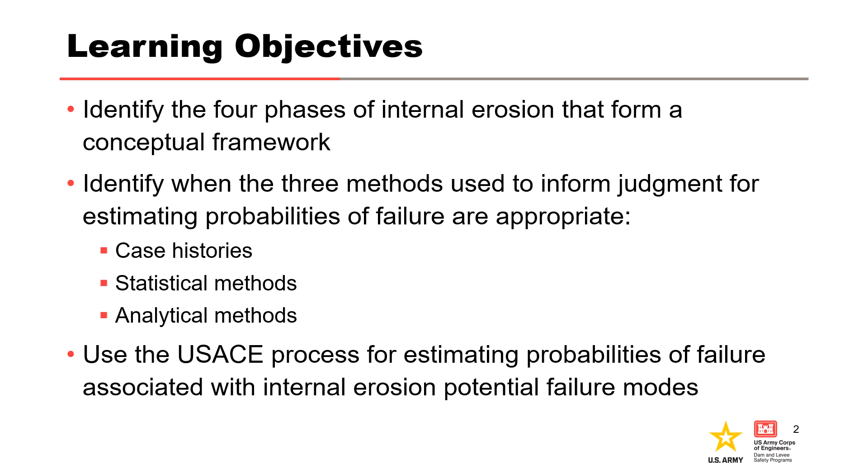Here is the outline for this presentation. The conceptual framework for internal erosion and its phases will be discussed. There are three methods to help inform judgment when evaluating internal erosion potential failure modes: case histories, statistical methods, and analytical methods. This presentation will conclude by providing an overview of estimating probabilities of failure associated with the internal erosion potential failure modes.

Conceptual framework. Internal erosion has commonly been described as seepage and piping in the literature and by practitioners, but this poorly characterizes internal erosion. All dams and levees have some seepage as the impounded water seeks paths of least resistance through the embankment and foundation and should be controlled to prevent erosion of the embankment or foundation or damage to concrete structures. Seepage becomes a concern if it is carrying material with it.

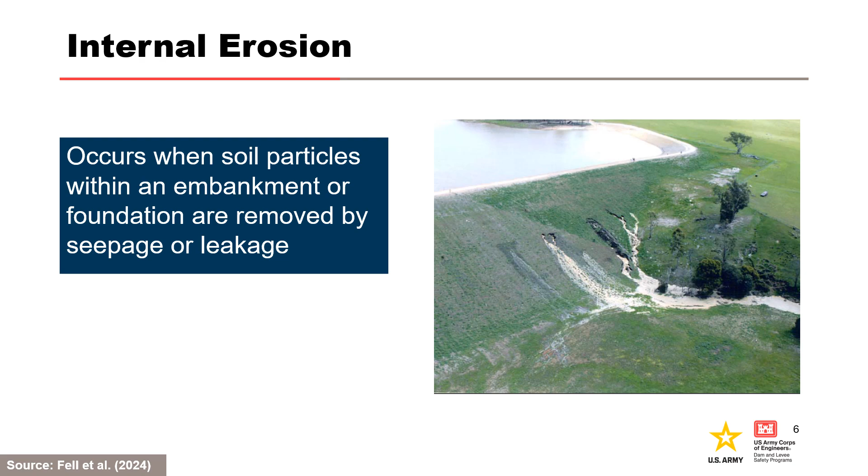Piping is actually the combination of a process of internal erosion in which a number of phases must occur and be sustained in order that a pipe develops through the embankment or foundation and allows the passage of considerable quantities of water, which may lead to a breach. The previous slide mentioned that seepage becomes a concern if it is carrying material with it. Internal erosion occurs when soil particles within an embankment or foundation are removed by seepage or leakage. Put another way, it requires a soil particle that can move and somewhere for it to go.

What is the difference between seepage and leakage mentioned in the definition of internal erosion? Seepage describes flow through a porous media, for example, flow through the void space of a coarse-grained soil, whereas leakage describes concentrated flow through preferential open pathways. These open pathways or defects can occur in soil as a crack, gap, or hydraulic fracture, or in rock as an open joint, seam, fault, shear zone, bedding plane, solution feature, or other discontinuity.

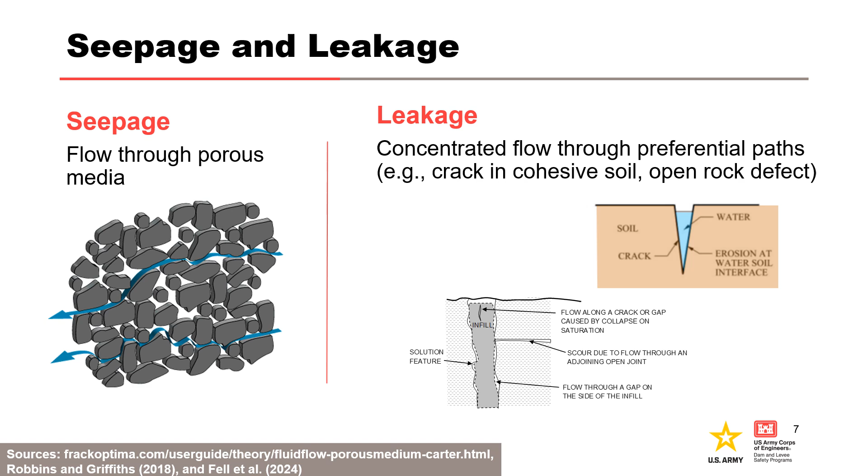A lexicon or terminology has developed over the years because there have been so many issues associated with internal erosion. Many different terms are used in the literature and even in the federal agencies. This figure illustrates specific mechanisms and processes of internal erosion that have been observed in case histories and discussed in the Best Practices Manual. The term process describes more phases of internal erosion than just the initiating mechanisms. The general processes to consider are concentrated leak erosion, backward erosion piping, internal instability, suffusion or suffosion, soil contact erosion, and internal migration or stoping. Both concentrated leak erosion and soil contact erosion are forms of scour.

Four of these processes are the same as in ICOLD Bulletin 164, with internal migration being added by the federal agencies. ICOLD Bulletin 164 describes a stoping process as global backward erosion and considers this a form of backward erosion. However, there is no consensus on this terminology. USACE added soil in front of ICOLD's term contact erosion to emphasize that this process occurs at the fine-coarse soil contact, not the soil-rock contact. Each process of internal erosion will be discussed in more detail throughout the course of this training. The hydraulic gradient influences the likelihood of initiation and in some cases progression of each of the 5 internal erosion processes.

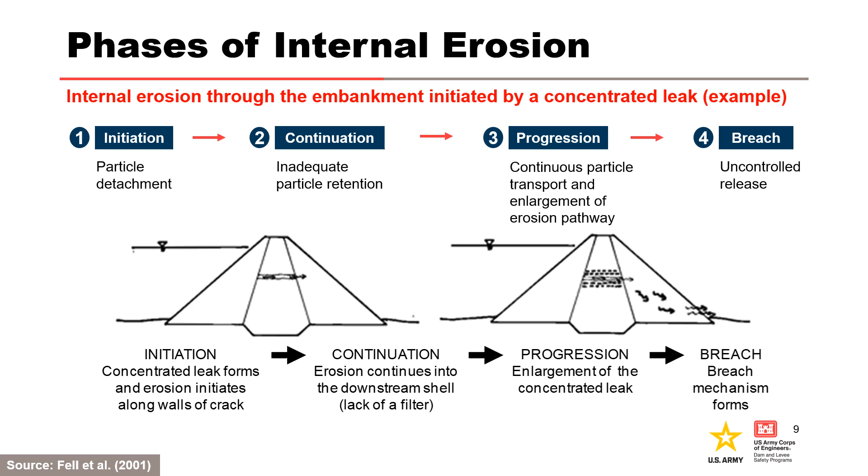In this example from Fell et al. 2001, the first three phases of a case of scour initiating a potential failure mode through a zoned embankment are illustrated. A generic sequence of events was developed for evaluating potential failure modes based on the four phases of internal erosion from the previous slide. The geometric condition for initiation is an inherent weakness or flaw in an embankment or foundation, not a phase of internal erosion. It can include material susceptibility on a particle size scale and continuity on a field scale based on an understanding of the site characterization, embankment and foundation geometry, and geomorphology and geology.

Initiation considers the hydraulic condition for internal erosion to start by one of the initiating mechanisms. Continuation considers the potential for an unfiltered exit and the particle retention capability of any filters or transition zones. Progression is decomposed into mechanical and hydraulic conditions. The mechanical condition considers the stability of the internal erosion pathway. This includes roofs of pipes or cracks and stable sidewalls for vertical cracks. The hydraulic condition involves continuous particle transport and enlargement of the erosion pathway.

Like flaw, intervention is not a phase of internal erosion, but can arrest the potential failure mode development. If detection and intervention are unsuccessful, breach occurs.

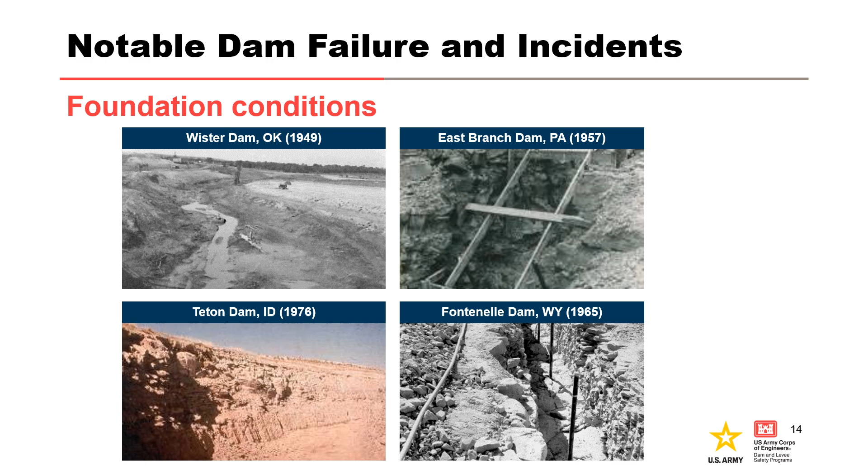Case histories. Incidents and failure case histories provide insights to use when evaluating an existing dam or levee. The foundation conditions for 4 key dam failures and incidents from USACE and Reclamation are shown on this slide. Often, the devil is in the details with respect to foundation treatment and defensive measures for the embankment.

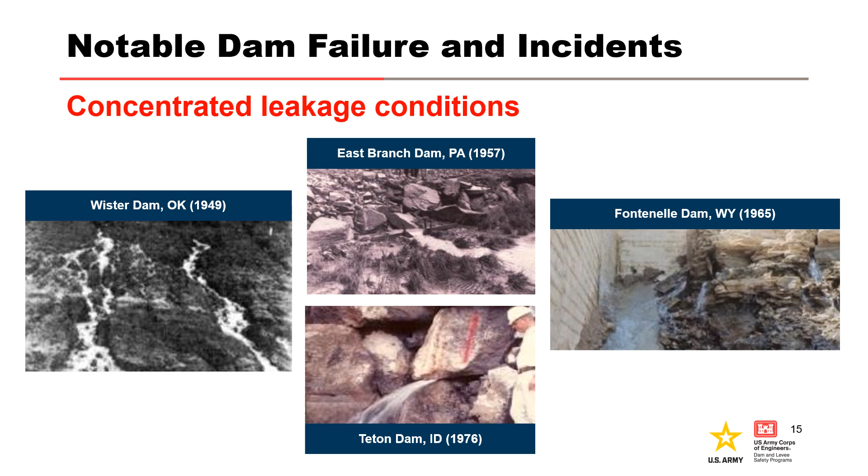For East Branch, Fontenelle, and Teton dams, a major lesson learned is that rock defects must be treated with dental concrete and slush grouting to prevent erosion into rock defects. There can be too much reliance on grouting. However, the foundation contact is paramount. The shape and geometry matter. Dams can crack, and every potential seepage or leakage exit must be filtered. A combination of susceptibilities often compounds the problem.

Case histories can help teams find potential susceptibilities at a project that make it vulnerable to internal erosion. This training course will examine the incidents at Wister Dam and East Branch Dam more closely and include some others. There are numerous case histories and compilations in the published literature. USACE, Reclamation, TVA, and FERC host a monthly case history webinar series to help share this knowledge.

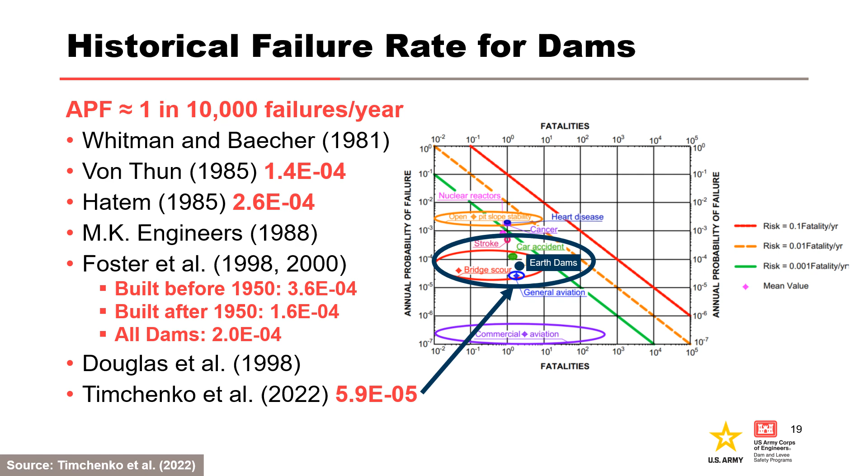This chart shows how the failure rate for dams compared to open pit mine slopes, bridge scour, nuclear power plants, as well as common human factors such as car accidents, airplane crashes, cancer, and heart diseases. This chart was originally developed by Whitman and was most recently updated by Timchenko.

Organizing case histories by location of the internal erosion pathway is useful to evaluate historical failures and incidents. But these categories are not potential failure mode descriptions. Creative thinking can be restricted if potential failure mode analysis is framed by prescribed location, which is often used in screenings. However, think about what is the greatest vulnerability for each location.

For additional categories, in this list, internal erosion associated with through penetrating structures is essentially a subset of internal erosion through the embankment. Conduits through embankment dams have historically been a problem area. They are essentially built-in defects.

No dam failures have occurred due to internal erosion into drains because there needs to be sufficient velocity to transport material once it gets into the drain. Drains tend to fill up with material and clog. Stoping typically occurs, leading to a relatively harmless sinkhole. Opening size limits expansion. Seepage or leakage has to find another unprotected exit point to progress. The potential failure mode can take a long time to develop, and because of that, early detection and successful intervention have stopped the internal erosion process.

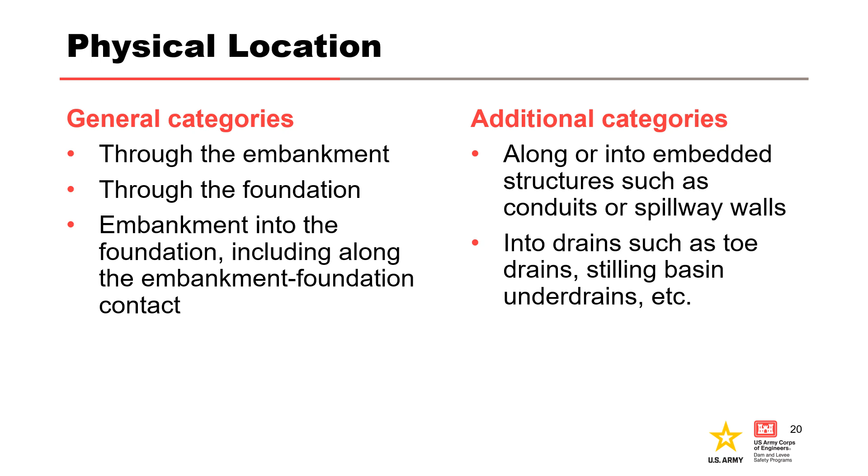Foster and others in 1998 and 2000 examined failures and accidents of large embankment dams constructed between 1800 and 1986, excluding dams constructed in Japan before 1930 and in China. Approximately one-half of cases of failure in operation were due to internal erosion. The largest number of failures occurred through the embankment, and nearly one-half of these were associated with conduits or walls

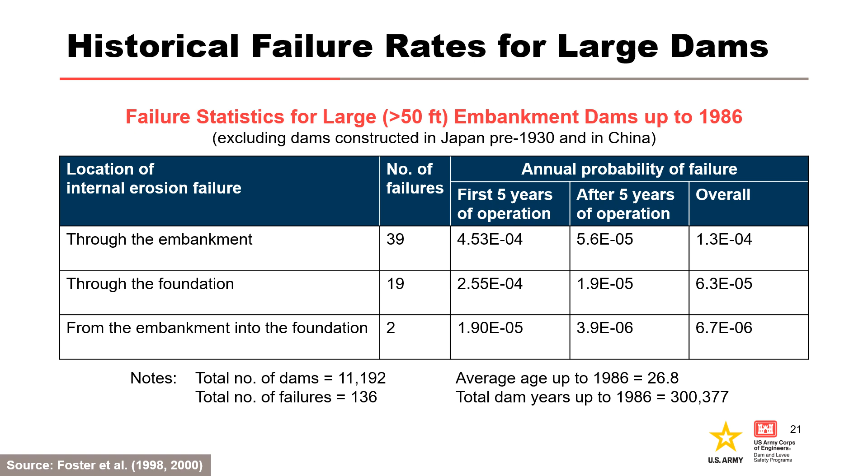which penetrate the embankment. Approximately two-thirds of all failures and one-half of all accidents occurred on first filling, or in the first 5 years of reservoir operation. Nearly all failures through the embankment occurred when the reservoir level was at or near, say within 1 meter, the pool of record. The historical annual probability of failure for locations of internal erosion are shown in this table. Again, for a specific dam, think about factors that make a potential failure mode more or less likely to occur than these historical rates.

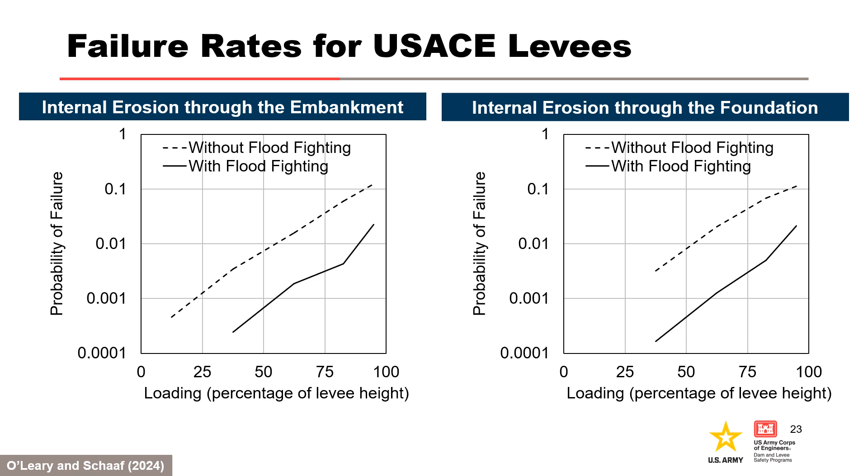Based on the USACE levee data reviewed so far, these failure rates were established for internal erosion through the embankment and through the foundation, with and without flood fighting, as a function of levee height. These rates provide some degree of ground truth after a team has estimated the system response curve. The team can qualitatively assess the levee being evaluated as being better or worse than the typical levee in the USACE portfolio and compare the conditional probabilities of failure accordingly.

Analytical methods. Participants have been provided access to the RMC Internal Erosion Suite of Microsoft Excel spreadsheets or toolboxes to support risk assessments for dam and levee safety. The training course will provide an overview and demonstration of some of these toolboxes and includes hands-on exercises using them. Because the toolbox is an Excel binary workbook and utilizes macros, you may need to enable macros before opening a file.

Although not included with each toolbox, a calculation cover sheet is strongly recommended. Typical information includes some project information, description and purpose of the calculation, the assumptions for critical input parameters, a summary of the major conclusions and results, and a revision history.

Each toolbox has a similar appearance and organizational structure. The first worksheet, About, provides a brief summary of the purpose of the toolbox and provides contact information for the RMC software development team. The second worksheet, Terms and Conditions, contains the terms and conditions for use of the toolbox or IWR software. The third worksheet, Version History, contains the revision history.

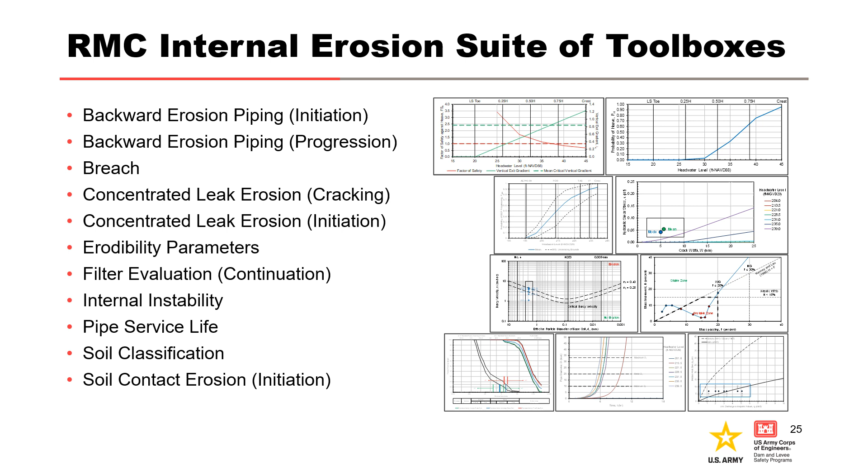A stepwise approach is used for most calculation worksheets in which complex analysis is broken down into smaller computational steps following a logical sequence. Tabular and/or graphical summaries are the primary output of the toolboxes. Samples of the graphical outputs are shown on this slide. Graphical summaries can be helpful in visualizing and understanding the estimated performance over the full range of loading conditions as opposed to discrete numerical results, and in the development of a list of more and less likely factors.

Internal erosion processes are complicated. The problem with internal erosion is that there is no well-defined physics-based model. Many of the models were developed under small-scale controlled situations in a laboratory that must be extrapolated to field conditions. The statement, "all models are wrong, but some are useful," recognizes that such models will fall short of the complexities of the geotechnical reality, but can still be of use.

Models can provide a consistent basis to inform judgment, but it is imperative that the user be aware of the assumptions, boundary conditions, etc. of the model being used, and discuss conditions making the event of interest better or worse than the model.

Estimating probabilities of failure. The purpose of this section is to provide an overview of the process of estimating probabilities of failure and to highlight some key considerations when making estimates. Part 1 of the Best Practices Manual should be consulted for more details. There are other training courses that provide much greater detail.

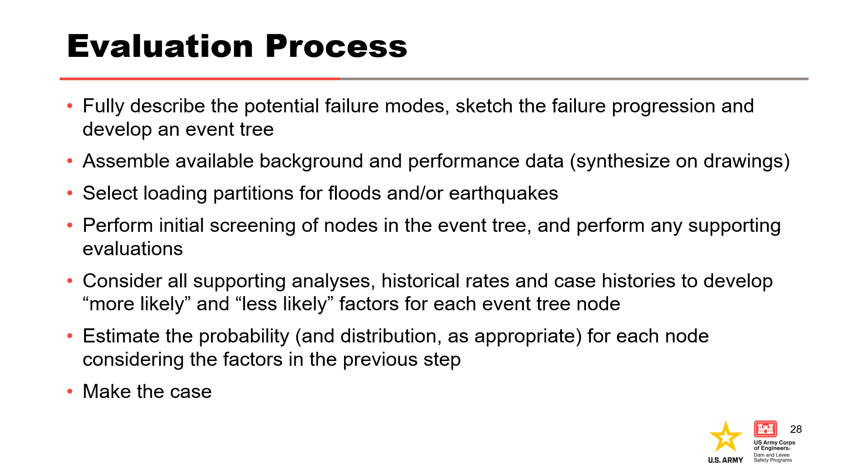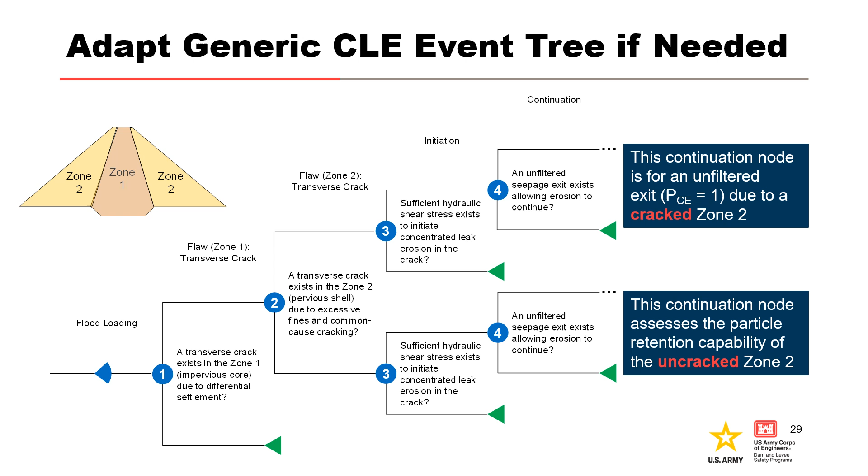Generic event trees will be presented in this training course. It may be necessary to adapt or decompose the generic event tree to project-specific conditions. In this example of a zoned embankment, the likelihood of Zone 2 cracking is being assessed. The outcome affects both initiation, because of effective length and hydraulic gradient, as well as the exit condition. Other nodes would be the same.

To assess the performance of seepage control features like toe drains, a node can be added to assess the likelihood of poor performance, which impacts the likelihood of initiation in the subsequent node. In this example, the impact of a non-woven geotextile filter wrapping a toe drain was being assessed.

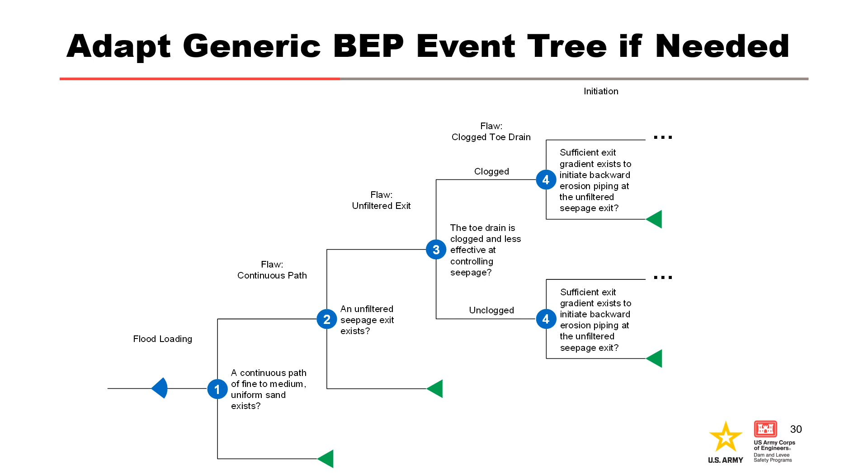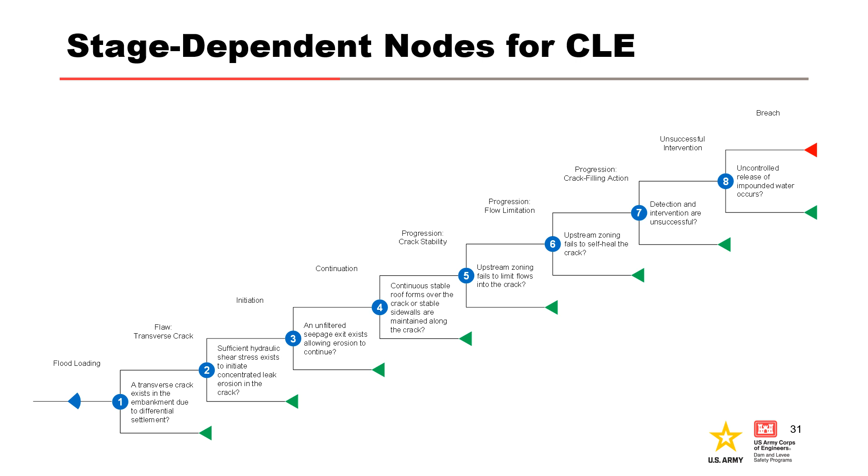As part of the advanced preparation, it is important to assess which nodes of the event tree are a function of stage. In this example, the generic concentrated leak erosion event tree is shown. What nodes do you think are functions of stage? Flaw can be a function of stage if it is caused by hydraulic fracture. Initiation is always a function of stage above the base of a pipe or crack and involves assessing hydraulic shear stress.

Continuation is a mechanical condition and not stage dependent. Upstream flow limitation may be stage dependent if a certain level is needed to exceed critical shear stress for initiation. Crack filling action is a mechanical condition and is not stage dependent. Unsuccessful detection and intervention may be stage dependent, but based on different stages. Detection depends on the ability to observe the seepage or leakage. Surveillance plans are usually a function of stage, but may not activate until a high stage threshold is exceeded.

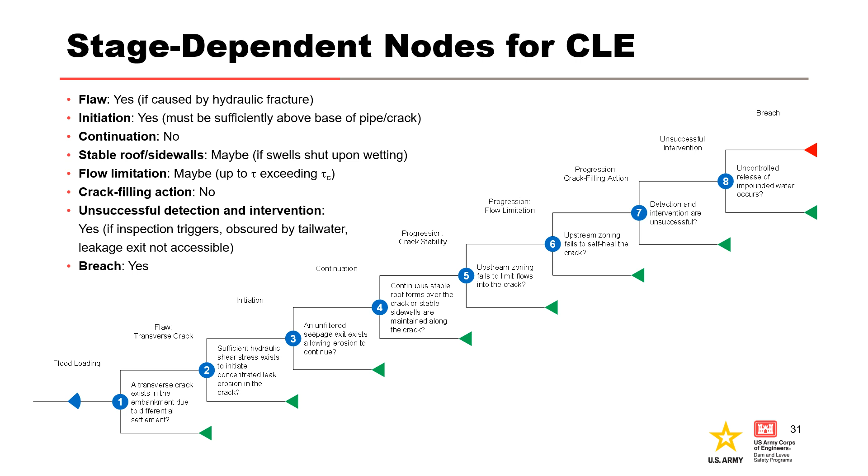Exits may become submerged with elevated tailwater. It may not matter if the exit location is obscured by vegetation or if the project is not staffed and no public is nearby. Intervention depends on the timing, but access may be cut off by the reservoir or spillway releases. Breach can be a function of stage since freeboard is an important consideration, and for small reservoirs, the reservoir level may fall below the base of a pipe.

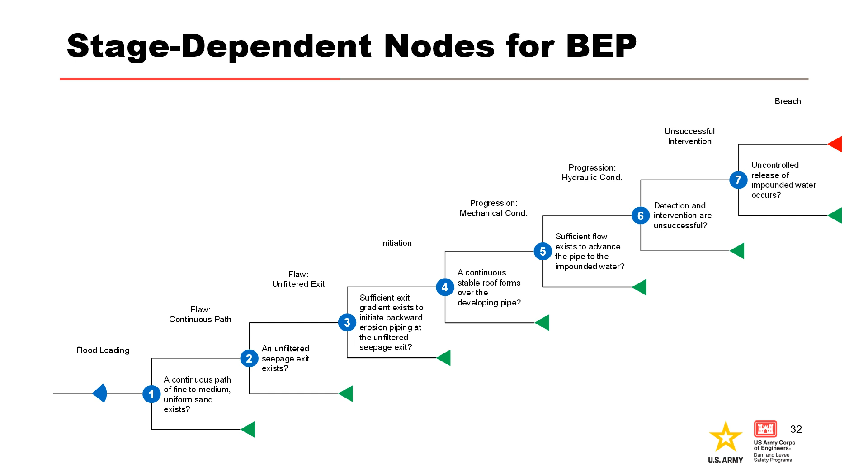In this example, the generic backward erosion piping event tree is shown. What nodes do you think are functions of stage? A continuous path is a state of nature and is not stage dependent. The unfiltered exit can be a function of stage if it is created by heave or blowout of a cover layer. Initiation is a function of stage for vertical exit conditions, but is not a function of stage for horizontal exits where the probability of initiation equals 1, or heave or blowout of a cover layer, to avoid double counting. This will be discussed in more detail in the backward erosion piping presentation.

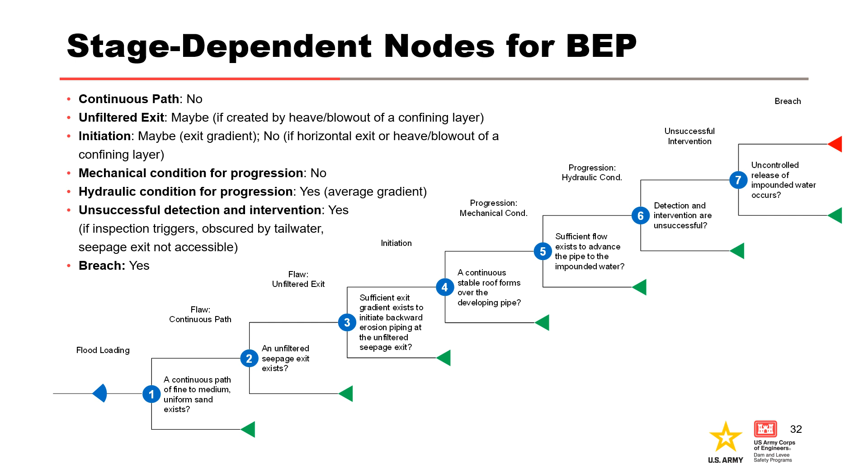Roofing is related to mechanical conditions and is not stage dependent. Average gradient is a function of stage and is used to assess the hydraulic condition for progression. Unsuccessful detection and intervention can be a function of stage, as previously discussed. Breach can also be a function of stage, as previously discussed.

A subjective probability estimate is the numerical value or range of values judged to be believable based upon the available evidence. Subjective probability estimates are typically made to represent the likelihood of each event for a potential failure mode that has been decomposed for event tree analysis. Although multiple approaches are encouraged to obtain supporting data to build the case, all final probabilities are estimated using team elicitation procedures based upon the totality and strength of evidence.

Why do we use subjective probability? For many dam and levee safety applications, there is limited statistical data to work with. We are evaluating the conditional probabilities of events that have not been experienced, or whose precursor events have not yet actually occurred. In addition, we are evaluating probabilities for which there are no well-defined analytical models for computing them. Chapter A6 of the Best Practices Manual covers subjective probability and elicitation procedures. A brief review of that material is provided on the next set of slides.

This leads to the question, how can I estimate a probability when I don't know? Not knowing is the essence of uncertainty. Subjective probability does not require us to know, only to honestly consider what we don't know and what we know. A subjective probability estimate is an expression of our state of knowledge at the moment. Whenever new information becomes available or the state of knowledge changes, our probability estimates may need to change as well.

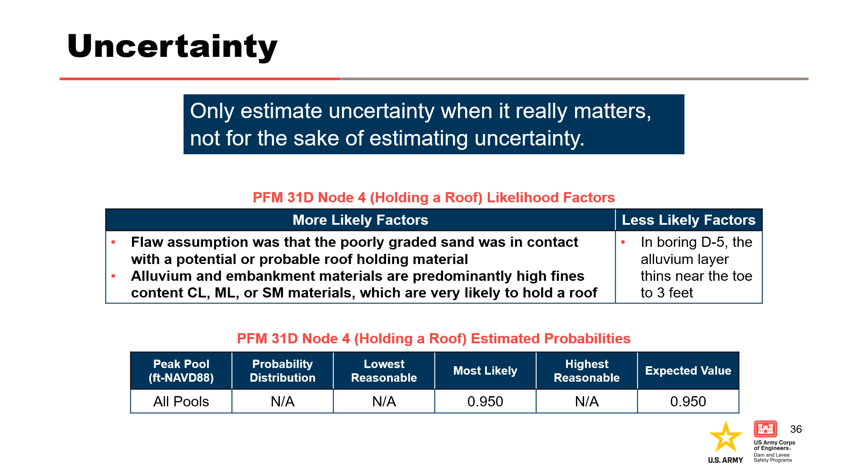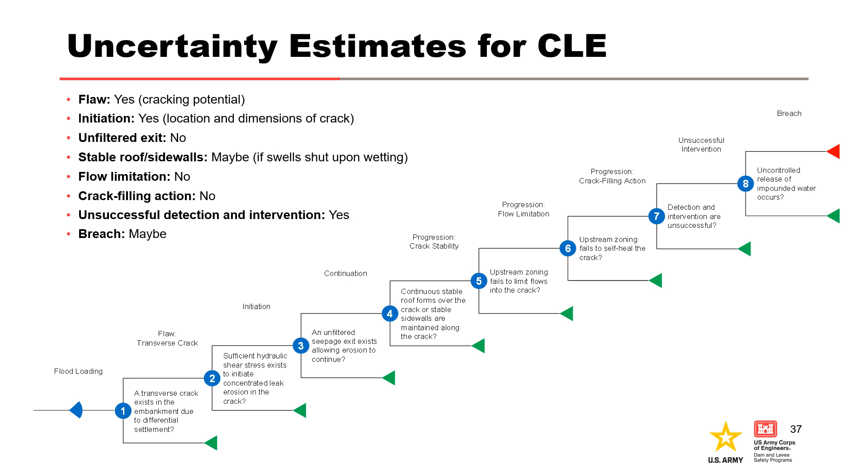In this example, the generic concentrated leak erosion event tree is shown. The presence of a flaw is often the greatest source of uncertainty and drives the estimate absent defensive measures. As previously mentioned, initiation is a function of stage and depends on the location and dimensions of the crack, for which there will be many uncertainties. Uncertainty can be considered for unsuccessful detection and intervention, particularly at lower stages, but at higher stages, successful intervention may become very unlikely. Lastly, depending on the breach mechanism and other factors, uncertainty can be considered for breach, but in a lot of cases, if all preceding events have occurred, breach is very likely.

In this example, the generic backward erosion piping event tree is shown. Similar to concentrated leak erosion, the presence of a flaw is often the greatest source of uncertainty and drives the estimate absent defensive measures. This will depend largely on the quality of the site characterization and performance history. Uncertainty is also usually considered for nodes driven by hydraulic conditions, unfiltered exit if created by heave or blowout of a cover layer, initiation, and progression.

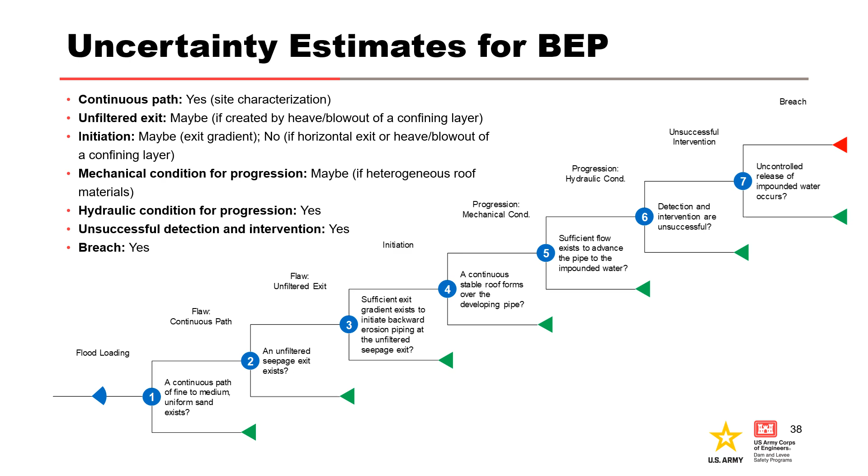For each node in the event tree, develop likelihood factors. This is a critical step in the process because it is where the case is made for the probability estimate. Key factors that carry more significance can be shown in bold. However, the case being built for the node and the probability estimate must agree with the key factors. Generally, the evidence should point one way or the other, but a single key factor can trump multiple factors in the other column. If the probability estimate is neutral, the factors in each column are generally equally weighted.

Summary. Terzaghi said the mechanics of piping defy theoretical approach. Internal erosion processes are complicated. For such a complicated process, those involved in the team elicitation should be ready to explore every clue available to guide their judgment to the less likely or more likely side of the event being considered.

It is essential to use the proper balance of engineering judgment and calculations when estimating probabilities, and to understand and build the case for what most influences the estimate and why. There are indicators that will allow degree of belief estimates based on site-specific knowledge. All final probabilities are estimated using team elicitation procedures based upon the totality and strength of the evidence.